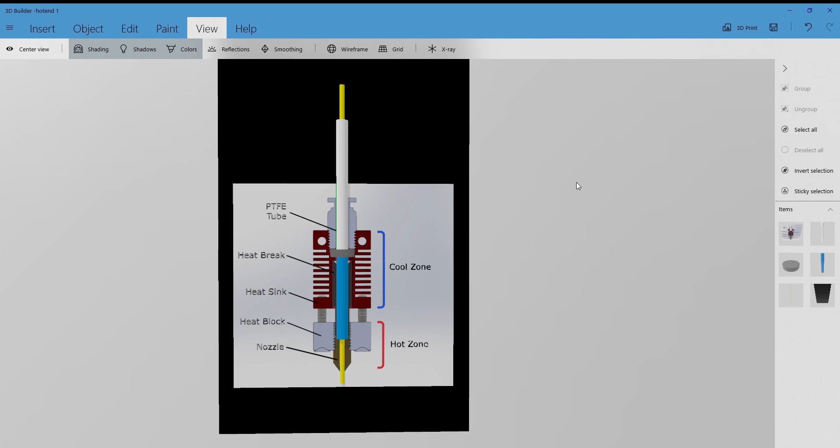This is just a quick rundown on a video I did earlier. Basically, this is a photo that I found on the internet, and right here you can see is the Bowden tube. This will be actually placed inside the coupler, and the idea is in order so that the Bowden tube doesn't continue all the way through to touch the nozzle, because the heat from the block and the nozzle causes crystallization of this white Bowden tube if it's too hot.

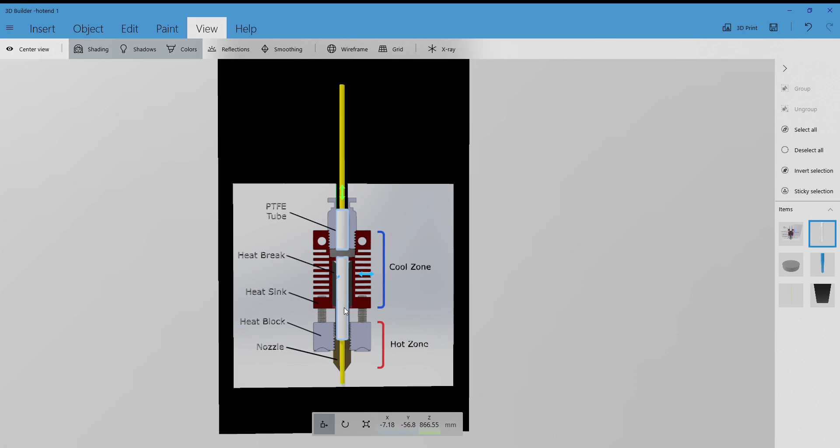Anything under, say, 210 Celsius is okay for long periods of time. Anything above that could be troublesome. So what I'm going to do is place this back up here. So to keep the Bowden tube from getting down to the nozzle, you want it to stop about right here, okay? It still locks in so that it doesn't pull out, and your filament right here can still be delivered from the extruder.

So you have the extruder, and then it will deliver filament. It will feed, say, yellow filament in this case, through the Bowden tube all the way from the extruder while the head is still moving. That's the whole idea of the Bowden tube delivery, is that you want the print head moving back and forth without any problems blocking it or extra weight with direct drive or anything like that. So continue to use the Bowden tube delivery.

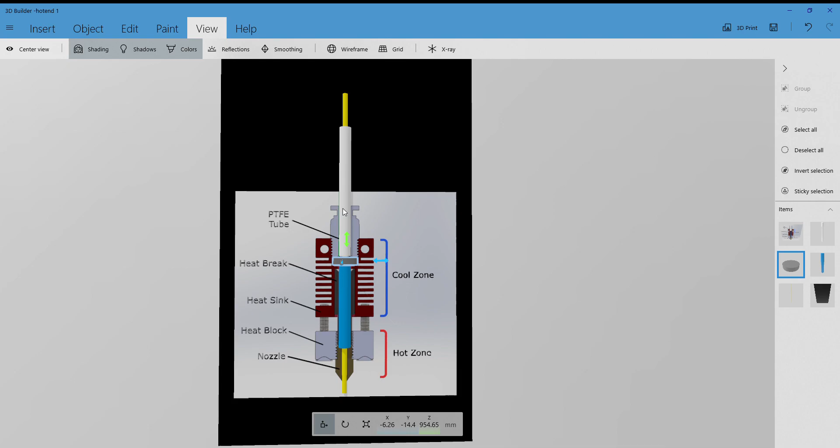The tube will go into the coupler. It threads in only so far. And then right here is a spacer. This will be placed in this location so that the white tube can't go through or this blue tube can't go up. So what you do is you place a short piece of high temperature blue tube in this location right here. See, right there, okay? And then it will take the heat that's caused by the heat block and the nozzle.

So that way the idea is your white tube stays here to deliver the filament. The spacer is placed right in this location right here, so it actually will hold the white tube back. The blue tube will be placed in from the bottom in this particular case, and then you will thread the nozzle in, which will press up against the blue tube, holding it here permanently in place. So it's pushed all the way up.

No gap will be here, because when you thread the nozzle in right here up against this tube, it will slightly press against the blue tube so that it's sealed right here. There'll be no gaps for filament to leak out, and it will have to go through the nozzle. So the filament will remain fairly rigid all the way up to this point until it gets to the very hot part of the block. Then it will start melting.

So the filament is rigid all the way to here. Then it starts melting right where it should. No oozing out any space, because there wouldn't be. So this tube would be permanent, and then the nozzle would then be placed in place. So this whole setup will be able to be used without any changes.

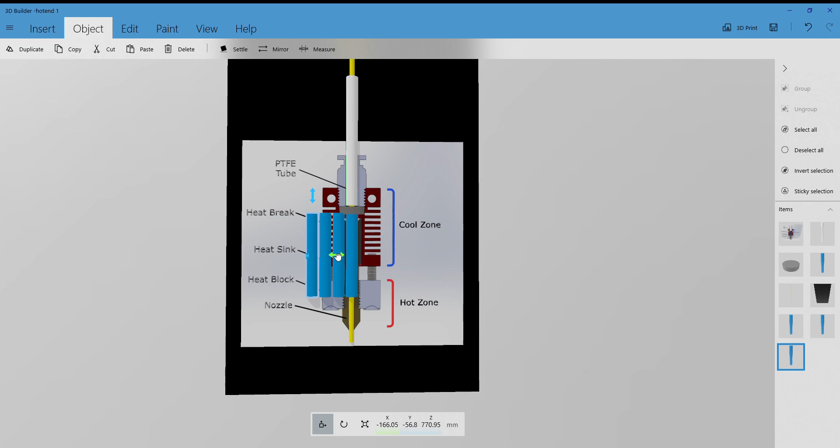Now, if something happens to the blue tube, say you use it a lot at higher temperatures, because now you can print at high temperatures, and it won't really matter so much to the tube up here, okay? So the idea is if that starts to decay a little bit, cut yourself several of these pieces. Let's go here. Object, duplicate, boom, boom. Let's get several of these pre-cut, okay, so that if indeed this tube starts to go bad,

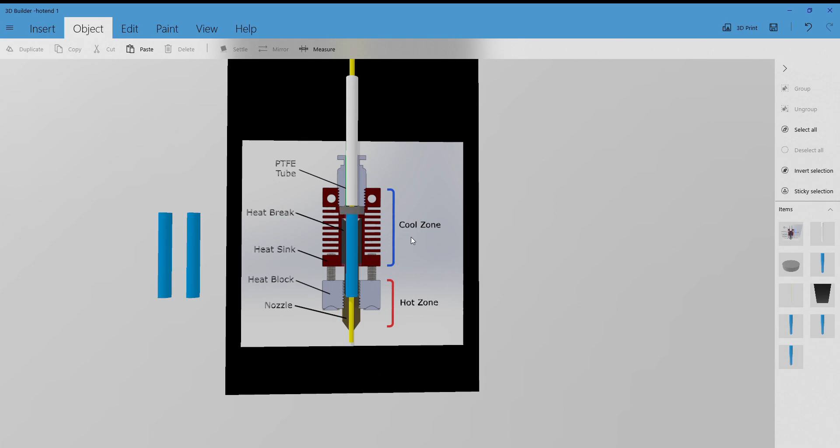you take this out from the top, you pull it out, right? Then you place another one in the same location, brand new, okay? And then you're back to where you were before. So this is a way so that you can still use a high temp delivery. Or this is the white regular standard low temp delivery tube, which is great. You have your spacer, you have your high temp tube, you have your nozzle, which is threaded in, and it'll literally pinch this tube in place. So there you go. That's how it's done.

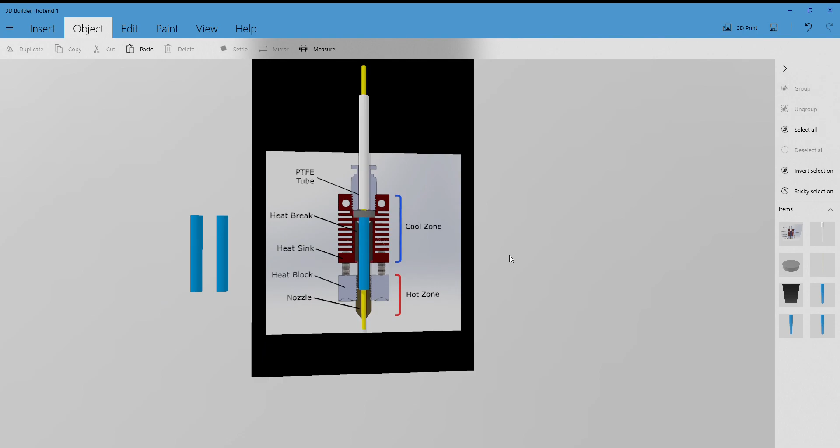You don't need to get that aftermarket metal high-end heat break, whatever the hell they call it, because they're saying you have to rethread this location. You've got to lubricate this location, because again, with that heat break there, the filament is still going through a metal piece. Even though it can dissipate the heat well, it's still going to get soft right in here, and it might mushroom out and cause friction and a problem.

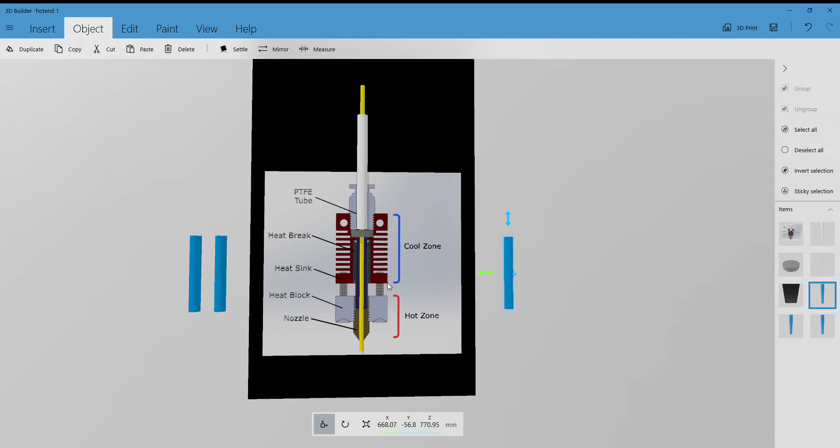So keep your regular hot end, return this right here in place. So now you have your white tube delivery, you got your spacer to keep anything from going through, you have your filament continuing on through, and it's good to go. Give it a try. See what happens. What can it hurt?